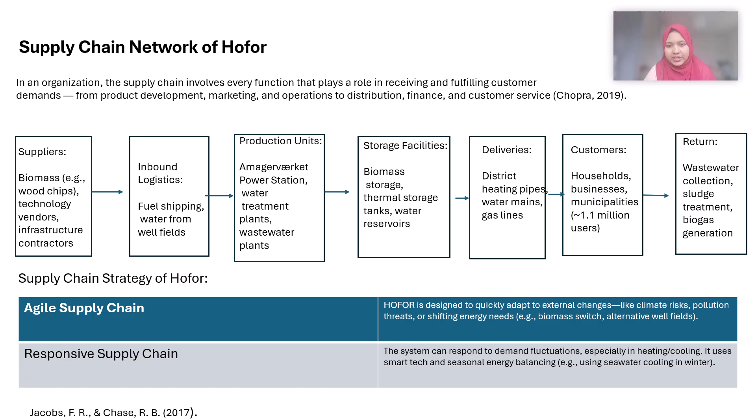Before we dive into the analysis, it's important to understand the framework we are using. SCOR provides a standardized model for analyzing, improving, and benchmarking supply chain performance. At the heart of the SCOR model are six core process areas that map out the end-to-end supply chain.

Plan. This is the first step. This involves strategic planning, forecasting, and aligning supply with demand. It's also about making sure the right resources are in place to meet future needs.

Secondly, source. Focused on the procurement of materials and choosing the right supplier for consistent and high quality input.

Third, make. This is where value is created through manufacturing, or in a service context, through production and delivery of the service.

Deliver covers all distribution activities, logistics, order management, and customer service. Return manages the reverse flow of goods, whether it's returns from customers or recycling and waste handling. Enable is the backbone of a functioning supply chain, a newer addition that supports all the other processes.

It provides greater visibility into supply chain performance and weak points. It boosts customer satisfaction by helping organizations better manage delivery times and product availability. It helps reduce costs by identifying and eliminating inefficiencies. And importantly, it provides standardized performance measurement.

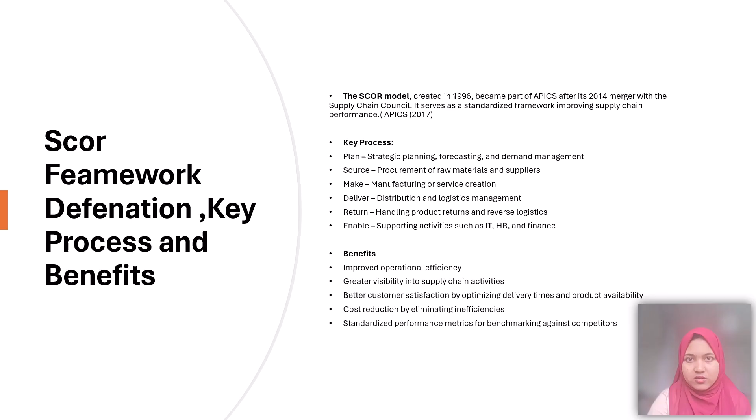Now let's take a look at how the SCOR core model maps onto HOFOR's supply chain. We start with the plan phase. HOFOR engages in strategic planning to forecast demand for water, heat, and energy across the Copenhagen region.

Next is the source process. Here, HOFOR procures essential inputs like certified biomass, fresh water, and technology services.

Moving to make, or in HOFOR's case, transform. This involves producing district heat from biomass, cleaning and distributing safe drinking water, and generating renewable energy.

The deliver function is where HOFOR ensures timely and reliable delivery of heat, water, and gas to customers.

Now we come to return. Return at HOFOR involves the treatment of wastewater and the extraction of biogas from organic waste, a great example of circular economy in action. And finally, the enable process.

This supports every other function. HOFOR uses smart systems, including AI and IT sensors, for data-driven decisions. They invest in training staff in both digital technologies and green energy practices.

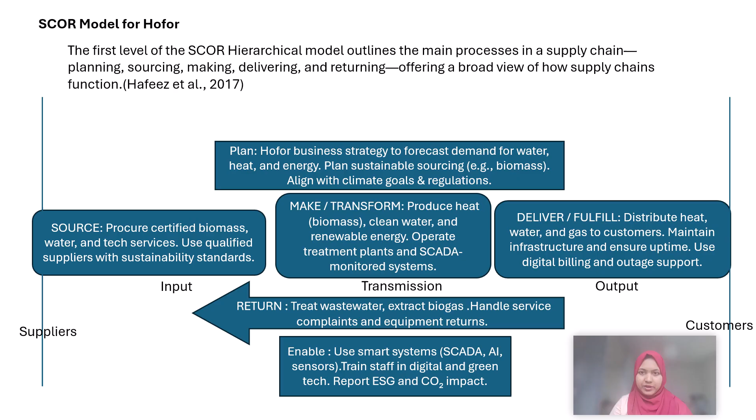In this slide, I will discuss HOFOR's sourcing strategy. Our sourcing strategy is built on sustainability, security, and innovation across all its services.

For drinking water, HOFOR relies on high-quality groundwater accessed through a completely closed system, which eliminates the need for chlorine disinfection. This ensures clean, great tasting tap water without compromising chemical quality.

In district heating, HOFOR meets 98% of Copenhagen's heating needs. The Amagerværket power station has been fully converted from fossil fuels to biomass, following major investment in greener technology.

For district cooling, the system uses seawater in summer, supported by absorption and compression chillers that utilize excess heat from the district heating system. This results in highly energy efficient, low emission cooling, a major improvement over conventional air conditioning.

Lastly, town gas or Bygas is supplied to Copenhagen and nearby towns. Since 2007, HOFOR has transitioned to Bygas2, a cleaner option. By 2013, it began incorporating about 30% biogas sourced from wastewater treatment at BIOFOS plants.

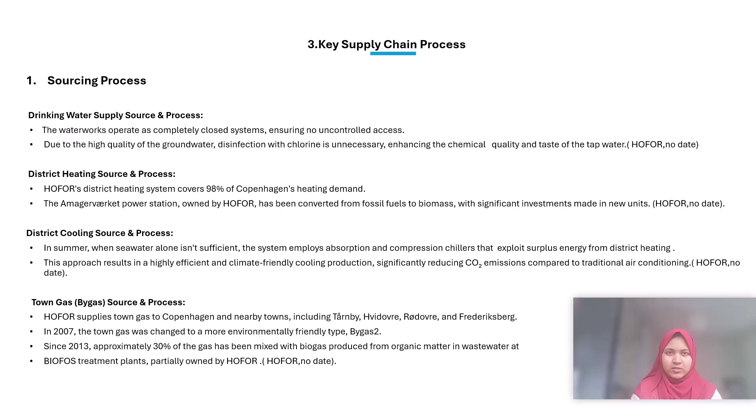HOFOR's delivery operations, particularly for fuel, are designed for efficiency, scale, and sustainability. Biomass fuel, primarily sustainable wood chips, is delivered by sea to the Amager combined heat and power plant.

Deliveries follow the Free on Board Incoterm, meaning the supplier delivers the fuel to the port, and HOFOR takes over once it's loaded onto the ship. At the Amager port facility, the biomass is unloaded using specialized equipment designed to handle large volumes efficiently.

The infrastructure ensures continuous operation and minimal delays. Once unloaded, the biomass is transferred to storage facilities with a total capacity of

105,000 cubic meters. From there, a powerful conveyor system feeds the boiler with 900 cubic meters of wood chips per hour, equivalent to one full truck load every 6 minutes, operating around the clock. The highly automated and robust delivery system is essential for powering Copenhagen with sustainable, uninterrupted district heating.

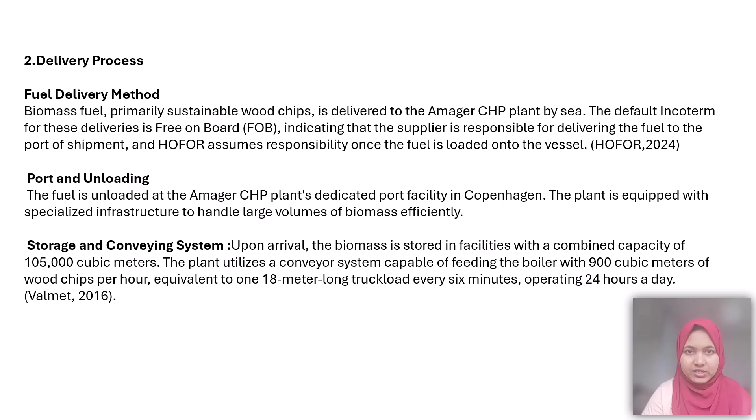HOFOR has a well-developed return and wastewater management system that supports both sustainability and operational efficiency. In terms of wastewater, HOFOR manages over 2,300 kilometers of sewers and 250 pumping stations across 8 municipalities in Greater Copenhagen.

Since 2013, they have been converting organic matter from wastewater into biogas, which is upgraded and fed back into the town gas network, supporting cleaner energy production.

On the material return side, items like defective components, unused construction materials, or replaced equipment are sent to a central warehouse for evaluation. These are either reused, refurbished, recycled, or repaired.

For customer-related returns, HOFOR handles billing adjustments for overcharges or service disruptions. Additionally, faulty or outdated water meters and heating system components are retrieved, inspected, and either reused or responsibly disposed of.

This structured return system not only supports circular practices but also improves service transparency and sustainability.

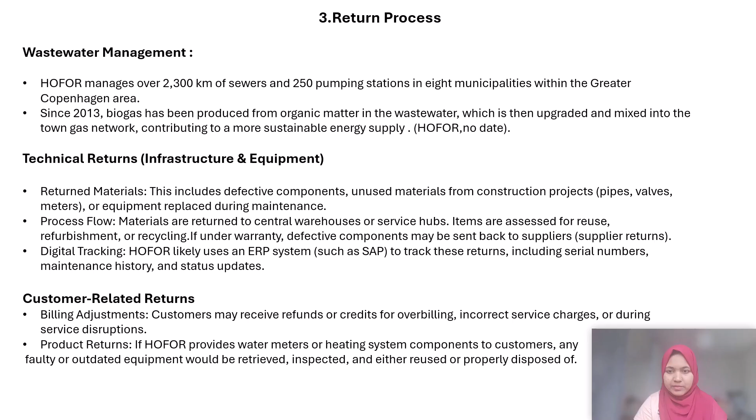Here I have presented the fishbone analysis of HOFOR. One big problem in HOFOR's supply chain is that groundwater is getting polluted and overused, mainly because Copenhagen is growing fast. As more buildings and roads are built, less rainwater can soak into the ground.

Instead, it runs off the surface, picking up dirt and chemicals that can pollute underground water supplies. Climate change makes it worse. Heavy rain and floods can damage the pipes and systems that bring water and energy to people. Also, as the weather gets hotter, people need more cooling, which puts extra pressure on both water and energy systems.

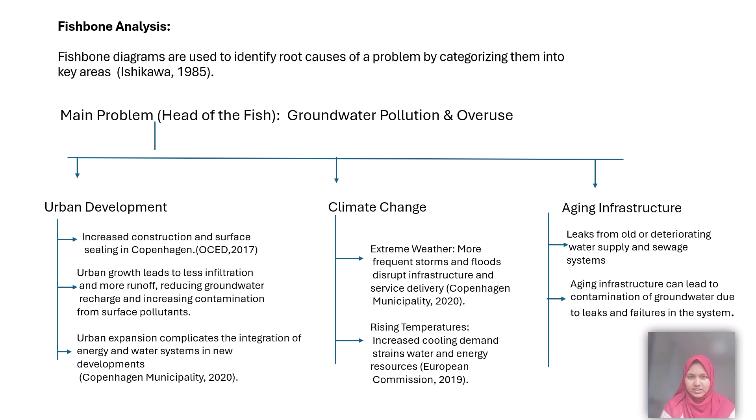Another problem is old infrastructure. Pipes and sewage systems are getting old, and can leak or break. This not only wastes water but also raises the risk of pollution and makes repairs more expensive. All of these problems are connected and make it harder for HOFOR to provide clean, safe, and reliable utility services.

To solve problems like groundwater pollution, city growth, and climate change, HOFOR can use some smart and sustainable ideas. First, they can use green spaces like rain gardens, green roofs, and special pavements that let water soak into the ground. This helps absorb rainwater and prevents flooding.

Next, by using local energy systems like microgrids, new neighborhoods can produce and manage their own energy. This takes pressure off the main energy system.

To protect against flooding, HOFOR can build things like flood barriers, ponds, and wetlands to handle heavy rain and rising water. Saving energy is also important. Things like LED street lights, solar panels, and smart energy systems can lower pollution and meet growing cooling needs.

Old pipes and systems need to be replaced and upgraded so everything works better and safer. Using digital tools can help monitor things in real time. Finally, working with private companies can help pay for these improvements and bring in new ideas.

Altogether, these steps will help make Copenhagen greener, safer, and ready for the future.